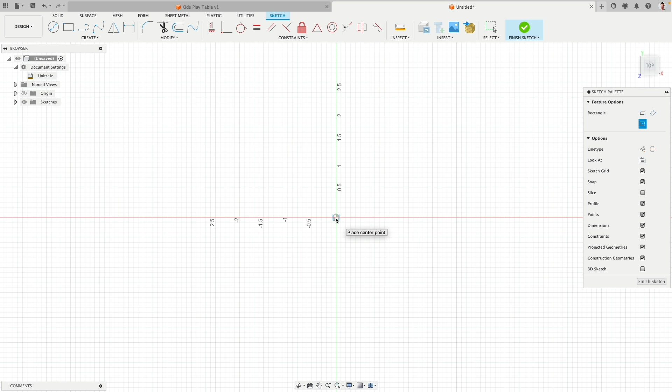Click the top view. Now there are really multiple ways how we can design this. Everything I'm going to show is just one way. So we'll create a sketch, click on the plane, create rectangle, center rectangle. I will start from the center point because I would like my rectangle to be glued to this center point. Drag this out and type in 24 inches.

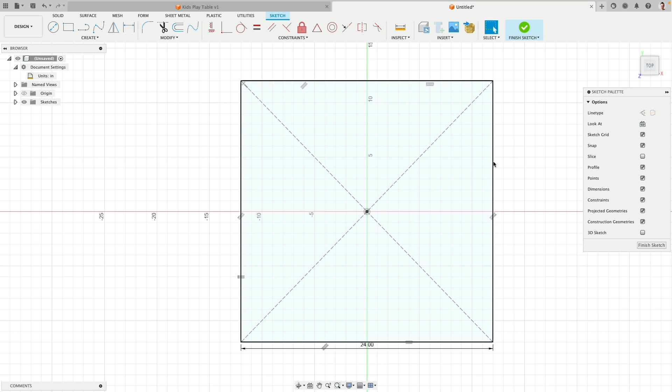Zoom out. I will go to the equal constraint and make both edges equal. So now when I change this, you see the other edge updates. So I have a square, not just a rectangle. Finish sketch. Let's change the view. I would like to have a tabletop that is actually half an inch thick. So I go to extrude, drag this up, 0.5.

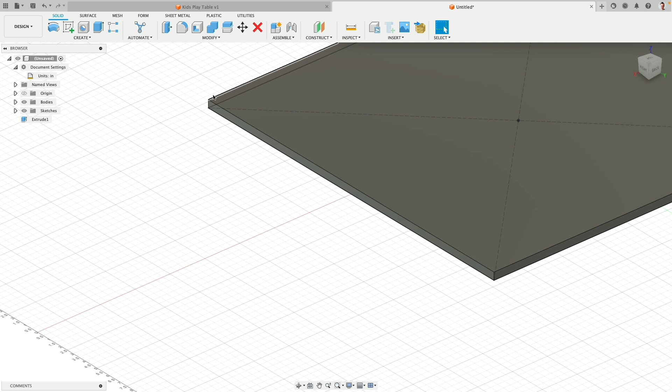There we are. I have some edges also rounded. So I zoom in and just select with the left mouse button and shift these edges. There we are. Fillet and say 2 inches. Press enter. Perfect.

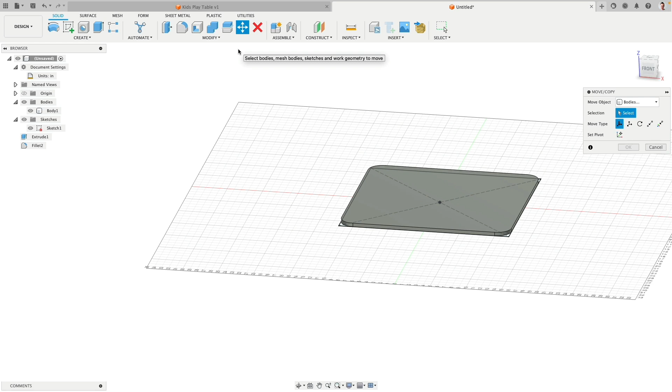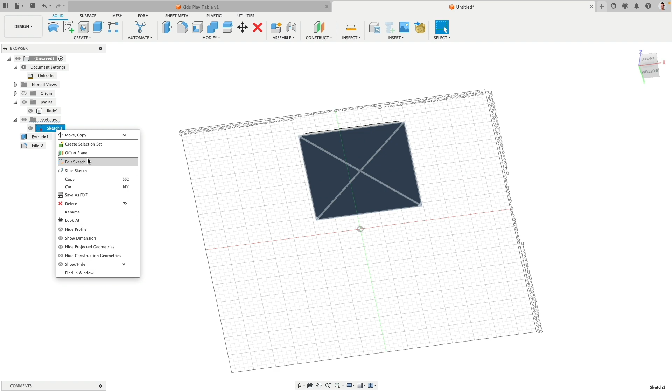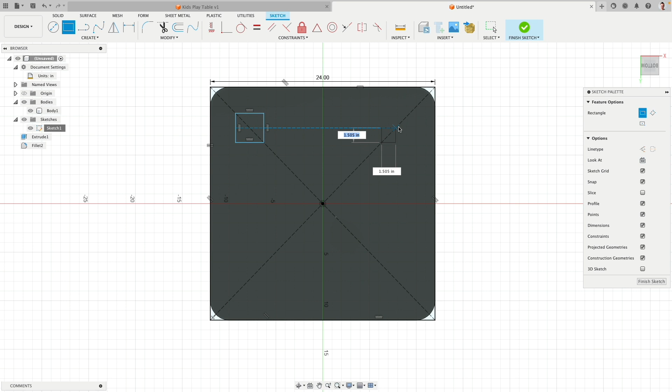Let's actually work on the legs. So I will go to the sketch, right click and say edit sketch. Instead of creating a new sketch, I just continue adding to it. And we need to have something for the legs and then the stabilizers. I will use the 2-point rectangle. Drag one here and drag one there. Then I go to dimension. This should be 1.5 inches.

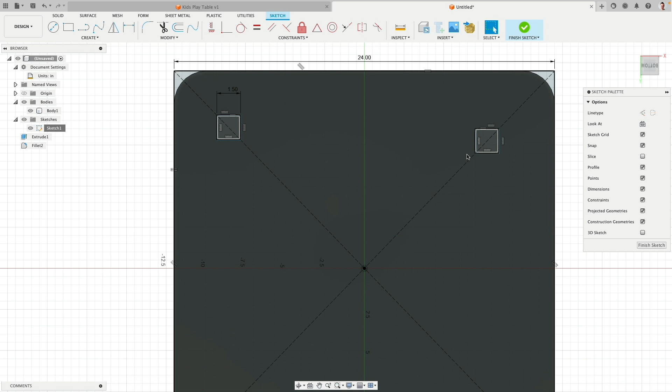I can go equal and say equal, equal. Perfect. So they're the same now. If I make this one, the other rectangle square will update. When you move your mouse to these endpoints, you see there's some additional icons popping up. This is actually the coincident constraint. I started drawing on this line and ended drawing on this line. So click, click. This actually glued these points right onto these lines. So I cannot move this rectangle anywhere else. I can only glide it along these construction lines.

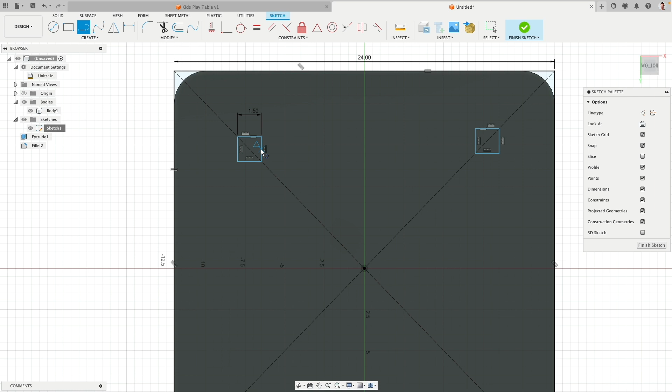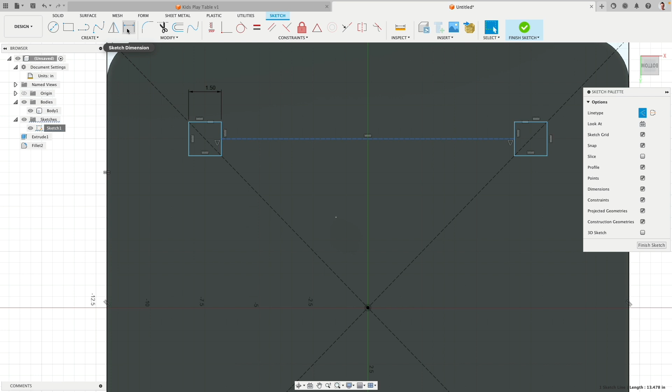So the distance should actually be 19 inches. So check this out. From the midpoint to the midpoint, I draw a line. This line now I will make horizontal. Then I will make this line, press escape, select the line and then go construction. And this is 19 inches. So dimension, there we are, 19. Perfect. Very good. This is actually very close to this edge. Let's go ahead and make this 18 inches.

Beautiful. We need to have 2 elements left and right that define, for example, the boards. You see in my case here, this actually is orange and a construction line. And that is because I have the construction line type on while drawing. Press escape and I turn this off and then draw, you see there it is. So how do we fix this? Easy, select the lines, switch it to non-construction line.

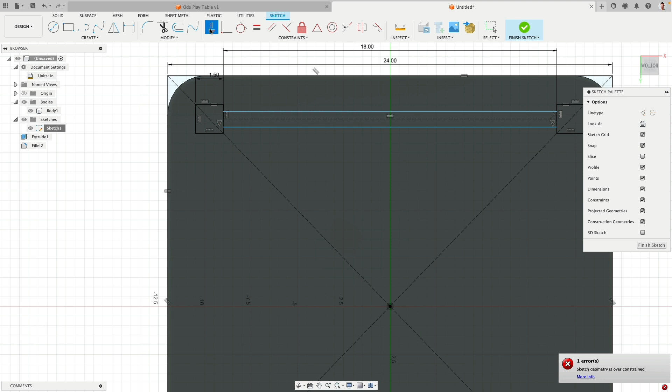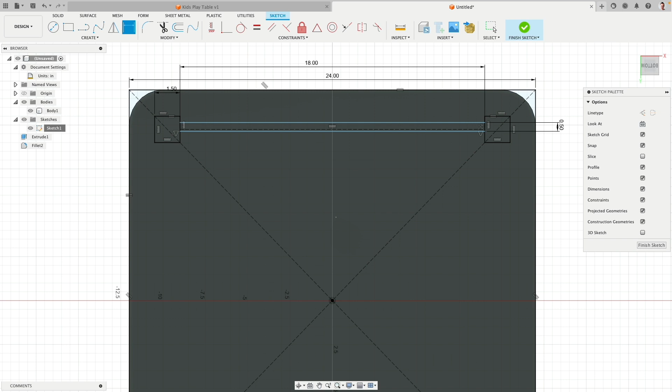I would like those to be horizontal. Perfect. It's over constrained. That means, oh, I already have perpendicular constraints. So this is good. Everything is perfect. Now the distance of these two should be ½ inch. 0.5. But now I would like these two lines perfectly evenly spaced from this line. So how will I do this?

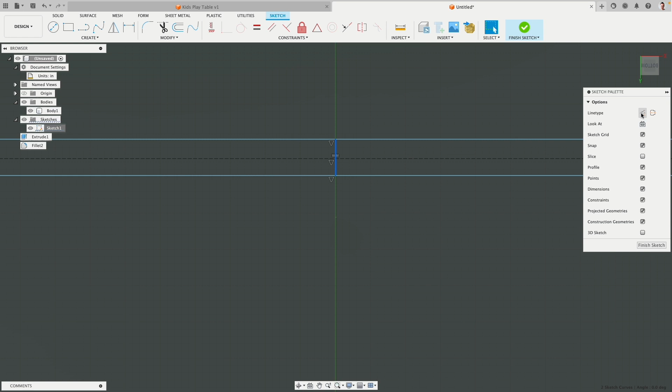Press escape, drag this one down a little bit, go to line. Here's the midpoint. Click to the midpoint, midpoint to midpoint, escape. Select these two lines and say construction. They're still selected and say equal. So that fixes it.

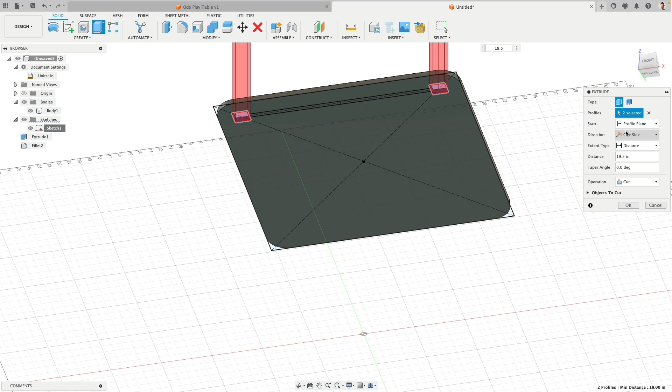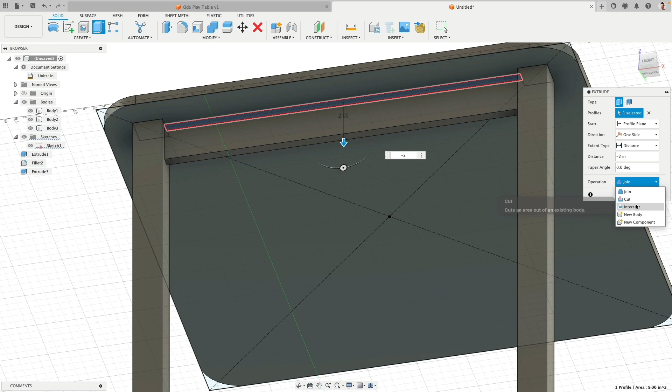Pretty nice. So what I can do now, I can select this and bring this down 19.5, the opposite direction, and as a new body. And then I can do the same also with the centerpiece, but that has to be a second modeling task. And we bring this down -2 inches. There we are. Beautiful. Kind of good.

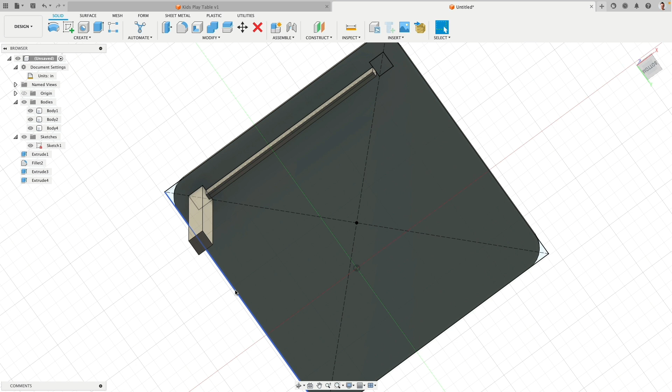This body here I will select and delete because I can actually select this and then rotate copy it. So I select this one, I select this one, then I go to circular pattern. These two bodies are selected. Select the axis, that will be the Z one.

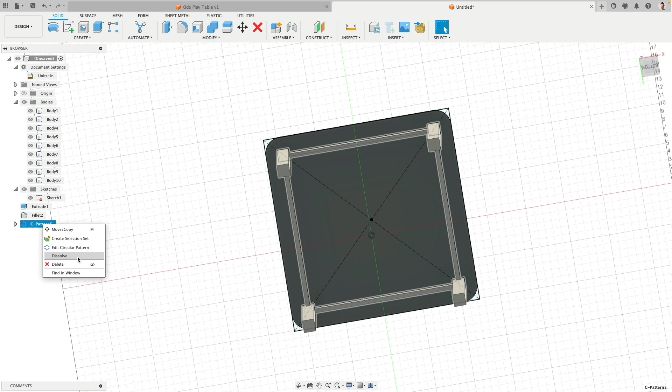4 pieces, thank you. Now because this is a rectangle, essentially we can draw a circle through the position where these legs are. That's the reason why the circular pattern actually here worked. Then dissolve and dissolve. Very good.

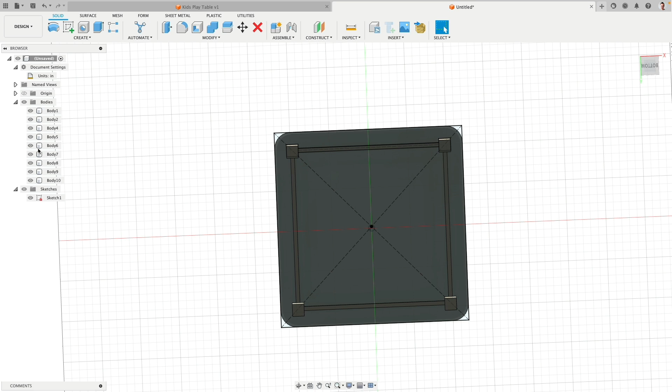To make this a little bit more stable in terms of furniture design, we need to have another support that's kind of like perpendicular to these lines. And that is connecting this piece to this piece to this piece. So it's actually pretty easy. Let's go right click, edit sketch, bottom, zoom in.

I will make my line here from there, kind of like to there. Look, this is now perpendicular to that ray. Perfect. Zip, there it is. And in case you do not see this, I will show you how we can do this. So this line to this line, be perpendicular. We need to close this sketch with a line. So no, this is actually a fillet.

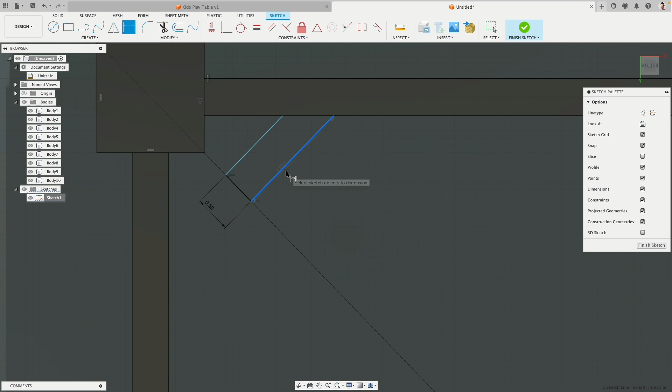And then this line here, I can dimension 0.5 of an inch. Very good. This I can also dimension. Pay attention to how I'm moving my mouse, a vertical or an aligned dimension. Let's say this should be 1.5 inches. So the whole piece will be 3 inches long. Beautiful. Cool. Okay. Finish sketch.

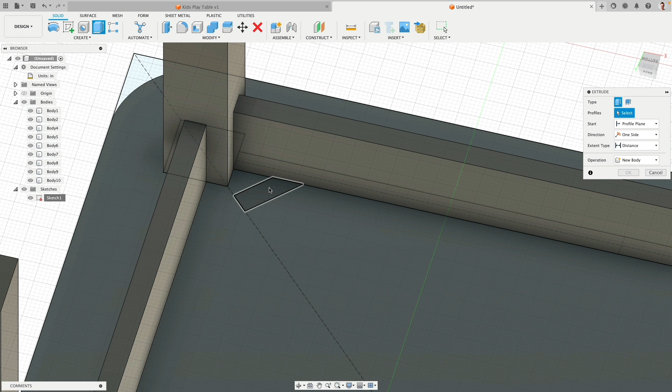Extrude this one up to here. You see I just clicked on that surface, so it copies actually the distance. New body. Thank you. I didn't draw the other piece. Well, I can use the mirror command. So this one along this face, join, yes. Perfect.

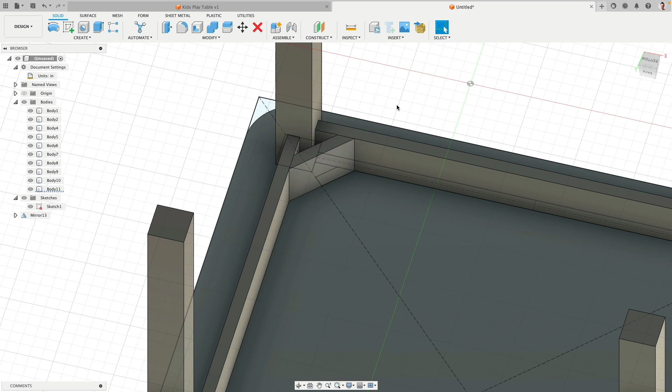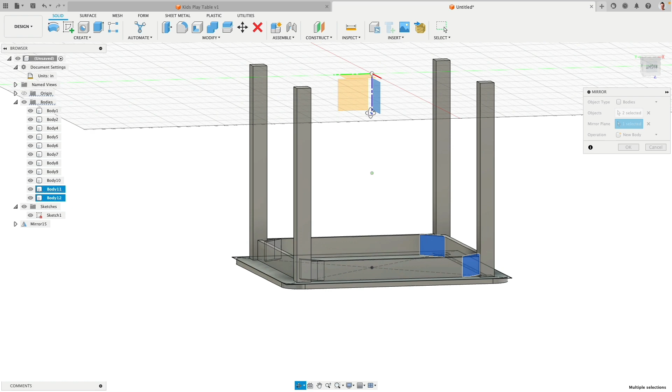Because this is a rectangular or square piece, I could go ahead, select this and say mirror. No, this whole body along this plane, and then all this mirror, so you and you along this plane. When I'm clicking there, you see the center planes. That's also why I work symmetrical along the center point of my sketch. Click OK. There we are.

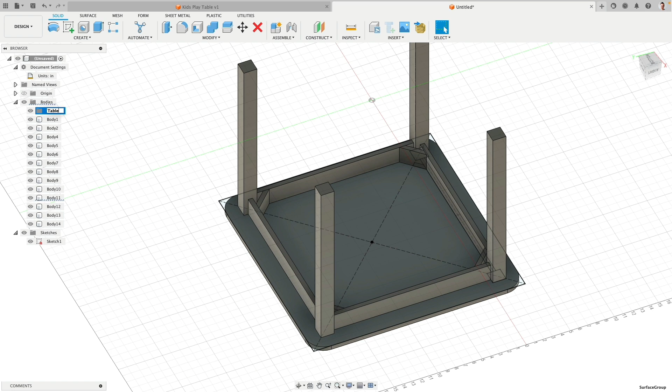So you see the outcome is the same, like the circular pattern tool. And there we are. Then we can make a new folder, double click, table, and then we put all these bodies in there. That's actually really nice for an initial study. Okay.

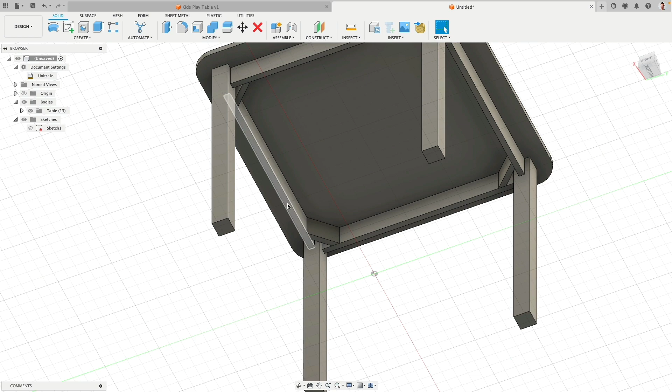Through here, for example, we would drill a hole and then put a screw right into this part, this edge. We would need to chamfer a little bit right where the mouse is and below, so it's a flat surface to drill into. And then here in these surfaces we would have holes to do screws and then connect actually the parts.

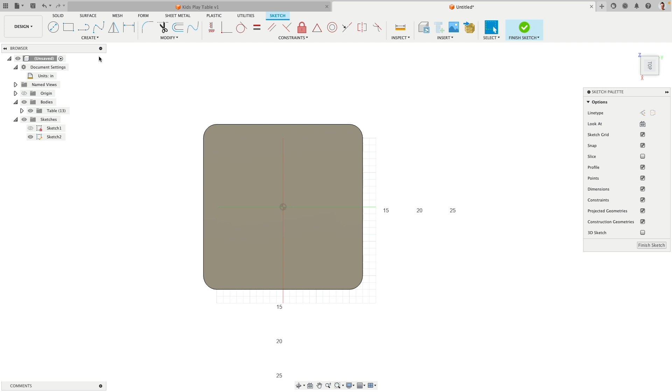Okay, so let's actually do the seat, the bench. So I go to top view, sketch. This time I just click somewhere on the white space that will be actually on the grid, on the ground. Then rectangle, center point somewhere here, and that should be 10 inches. There we are. Here again, the equal constraint.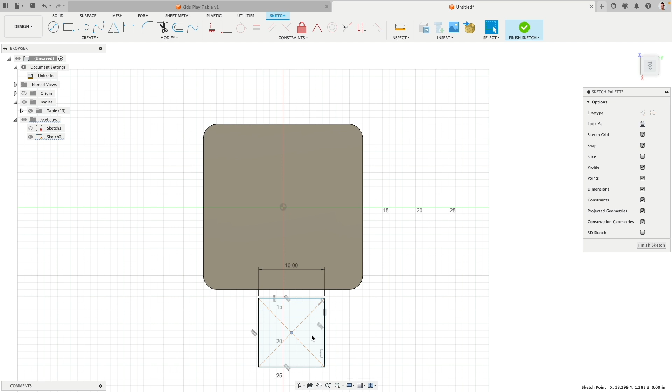And now I can move this, for example, out a little bit along this X line and figure out how does this look. This to this point. So the center point to the sketch center point, I would like to be horizontally, vertically constrained. You see now that actually I cannot move this left and right anymore, but only forward and backwards. That's quite useful. Okay.

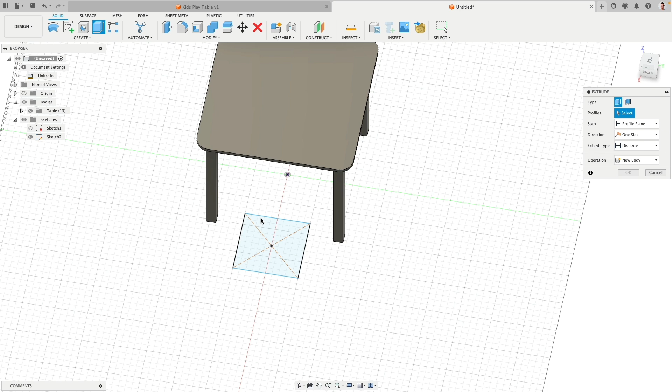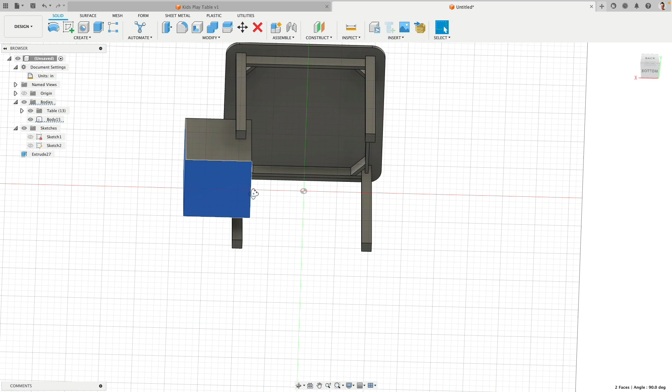This is all we need to build actually this bench. We go to extrude. This one goes up by 10.5 inches. That's a really nice block. How do we turn this into this design with all these parts without any extra sketches? It's actually very, very easy. So I select this face, this face, this face. So everything I want to carve open.

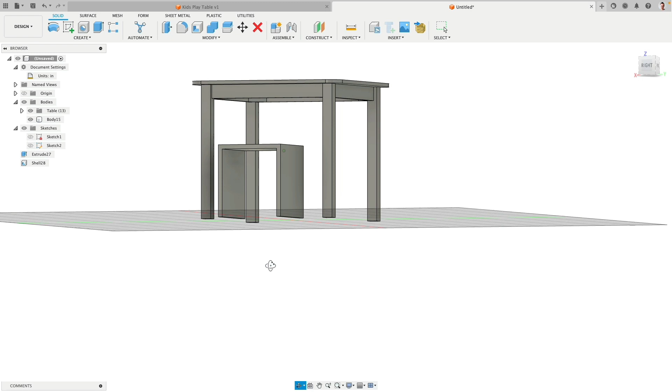Then I go to the shell command and say the material thickness is actually 5/8 of an inch. Beautiful. Cool. Okay, so now before I really continue prototyping a lot, I could go ahead and say, hey, let's quickly see how does this look when we do 4 pieces.

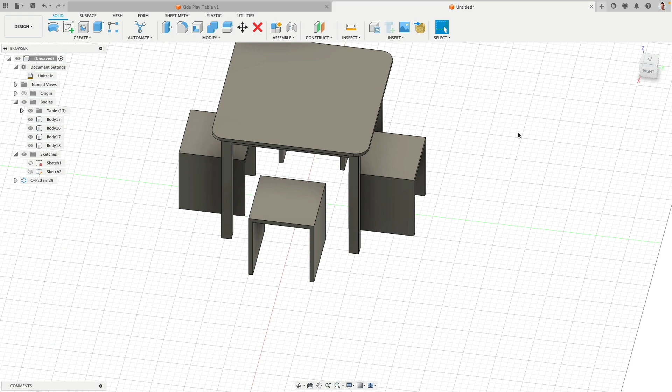Yeah, no, looks good. We can put all 4 benches under the table, 2 at least completely, or well, if we want to have all 4 a little bit under the table, that will work. So let's undo this step. This was a quick prototyping. I will hide the table so it's easier to see.

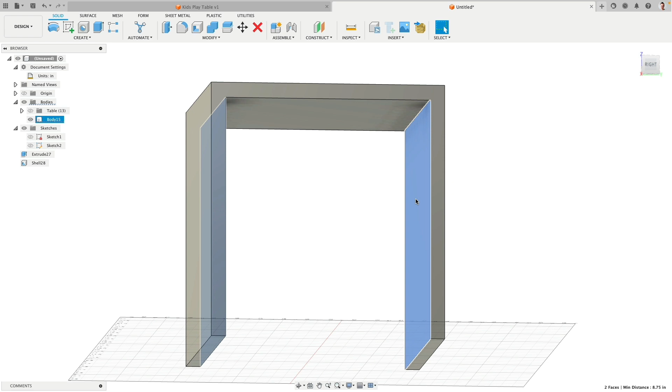This is going to be my main wood panel on top. So that should be the maximum height for the side panels. So I can go to split body. This body I split along this plane at the bottom. Now I already have my left and right leg. We know if I push on this side, everything will sooner or later rotate and break off.

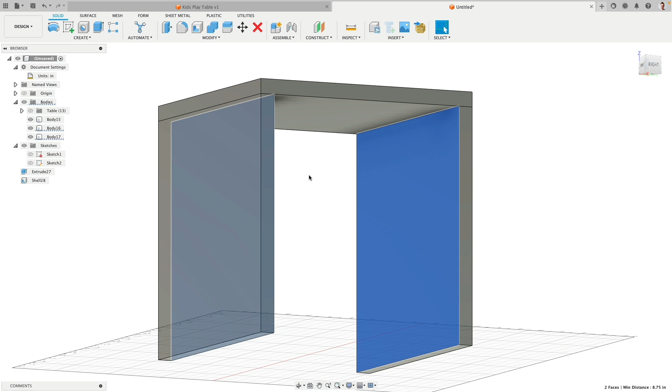I need to have something that stabilizes, kind of like restricts the movement, the rotation. Everything that can rotate in furniture design with wood, as long as it's not a joint, is sooner or later going to break, material fatigue. So we need to stiffen that up. And that's actually super easy to do. Again, this is just only one way how we can do this. There are multiple ways. Let's make a copy of this piece.

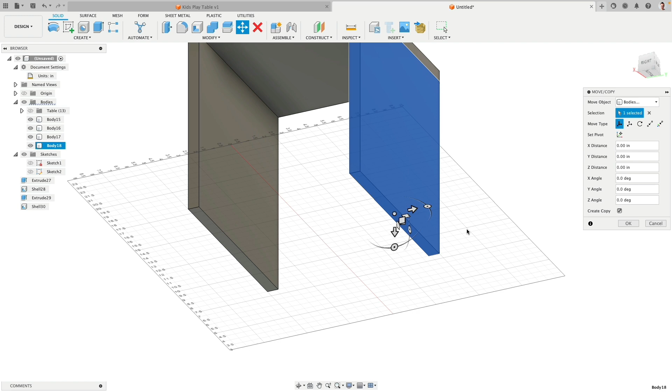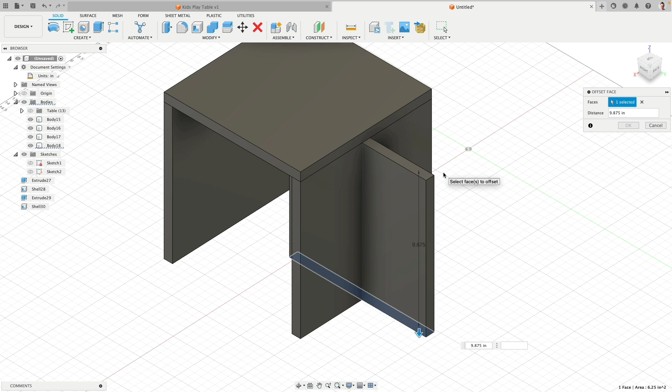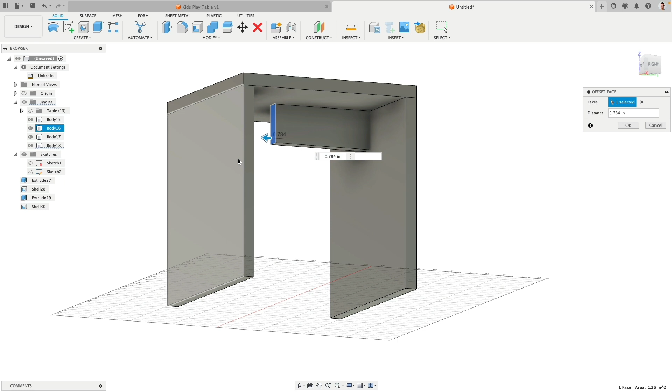Let's see, 4 inches. That's too much. 3, 2 is fine. Perfect. Okay. And now this face, I would like to move flush with this face. Right click and repeat. And this face, I would like to move flush onto that face. So you see, by just clicking on these target faces, it measured the exact movement distance.

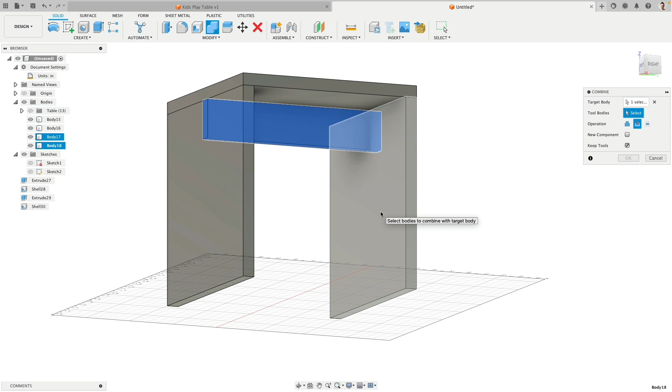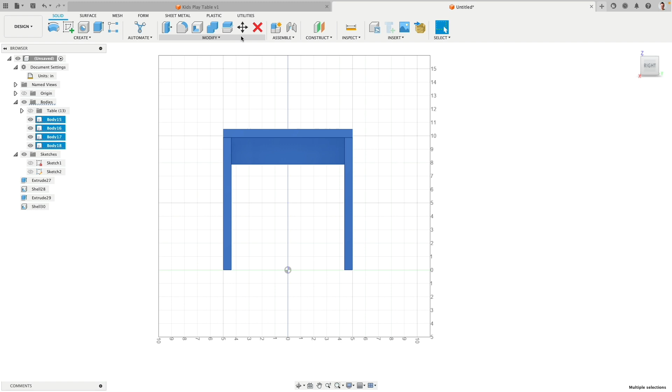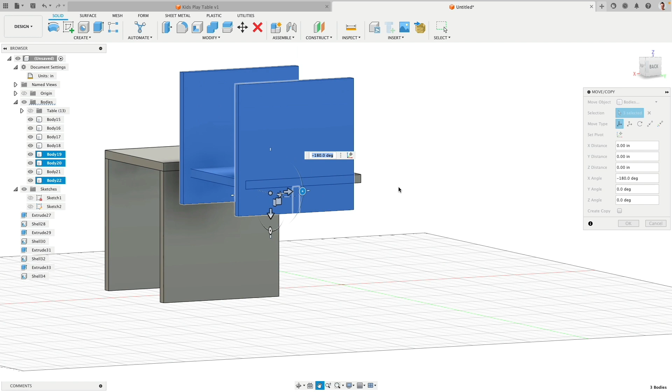Select everything, make a copy. Click on this button first. Bring this over there. Okay, and then I can select this body, this body, and this body. Going to rotate it. There we are. And then we do a move command and say this one to there. Plonk. Cool. There.

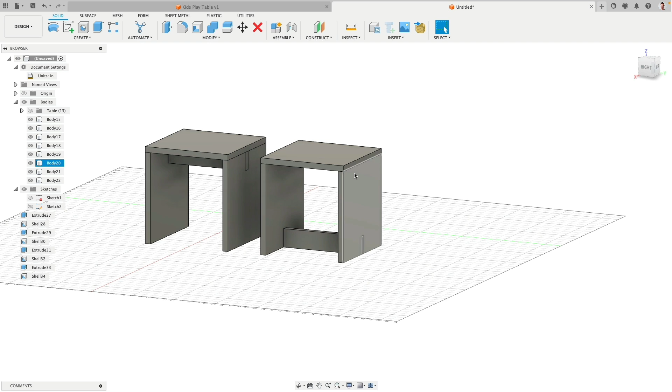Now, that's also one possibility. This construction is very stable because it prevents the legs or the panels really to move. The top panel actually keeps these two also in position. The only downside is we can't really slide anything under it. For example, the further we bring this down, the more we stabilize this. Okay, very good. So here we are.

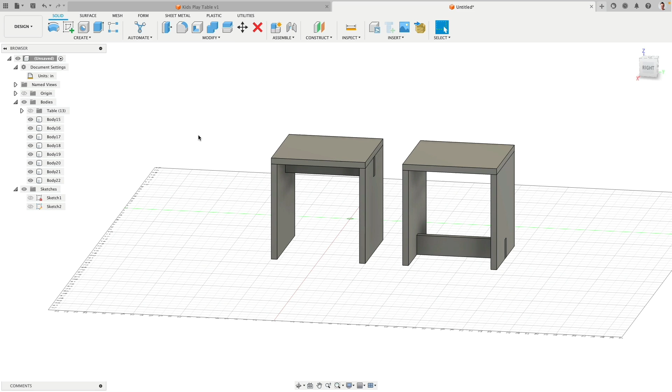Let's remove everything, and then let's make a new group. And let's say stool version A. And all this goes into there. And then we say create new group. This is actually stool version B. Whoops. All this goes to there.

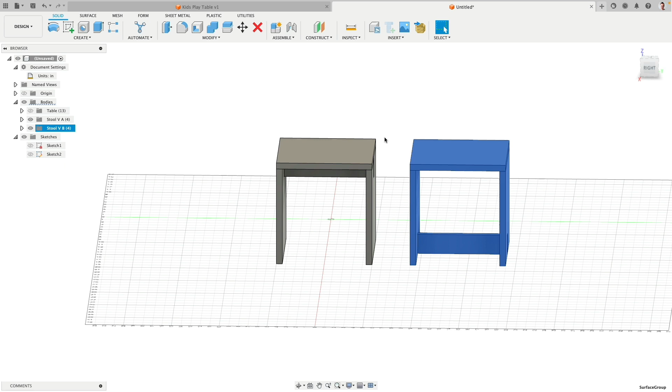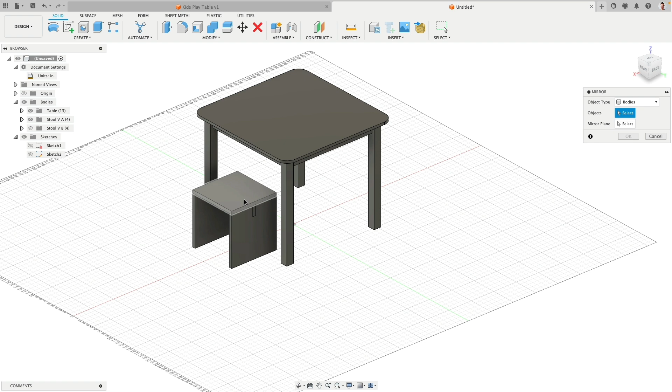All these pieces I would like to go into the correct position because we will make an alternating pattern. So from this to that. This one I hide, this one I show. So this actually I can easily mirror over to the other side. So I select all those to there. I could make a new folder, or I simply put this into the same folder.

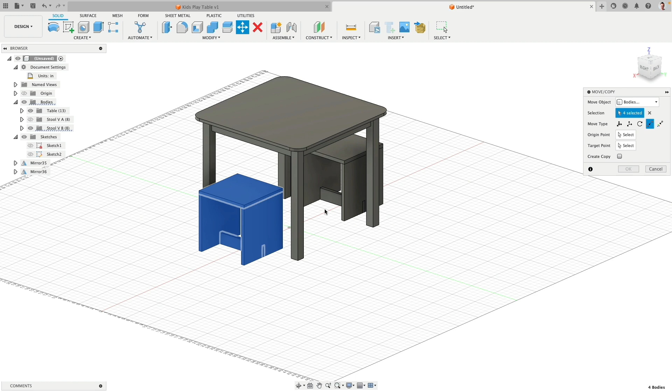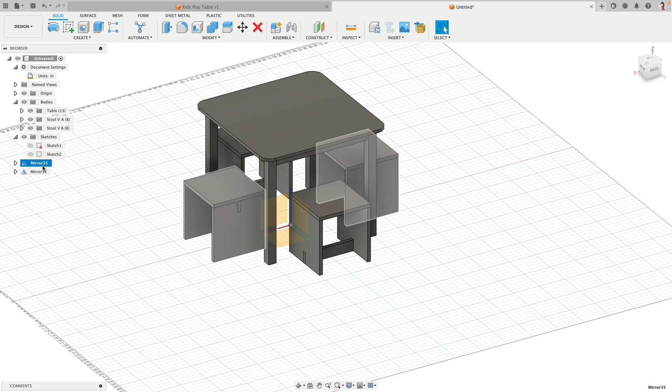And then here now I will do the same. Mirror, to there. Very good. Zack, zack, zack. Select everything one more time. Then we just do a simple rotation. Select the axis. There's no axis visible. If I go to origin, look, there's the axis. I can select and then rotate it 90 degrees. Cool. Some more dissolve stuff. And there we are. Now we have actually a nice design.

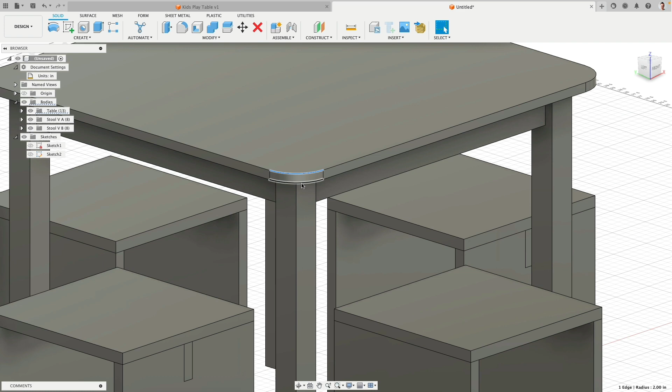As a finishing touch, sharp edges we don't really like. I can select these top edges and give this maybe 2 millimeters of edge rounding. Wait, we're in inches. We can type in millimeters? Yes, actually you can. That works really well in Fusion. There. Then I am also going to show you how we can fix and prepare this top part.

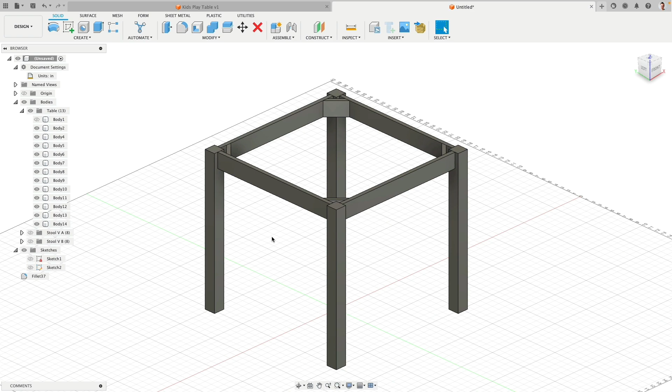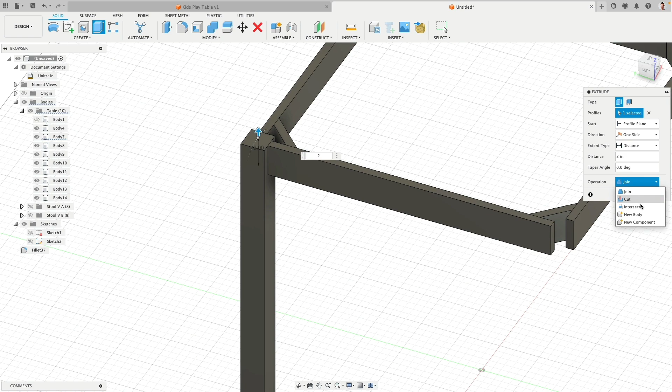So here, this edge needs to go down. So this body, and this body. So this one will go down -2. This one will go up by 2, but as a new body. Then this edge we will chamfer a little bit. Let's see by how much. 0.5. Okay, very good.

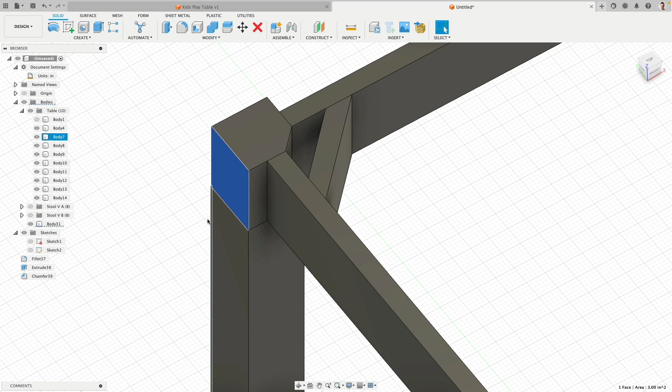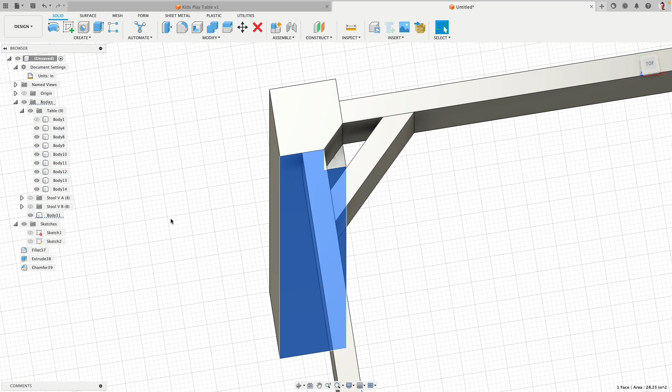Then we need to join these two together, so it's back one piece, but hold on. Why do I see two things there? Oh, keep tools. That's why. I want them to fuse. Now this is one piece again. And you see basically now I have this interesting element. Right click, isolate, so we can see better what's going on here. So this will be cut.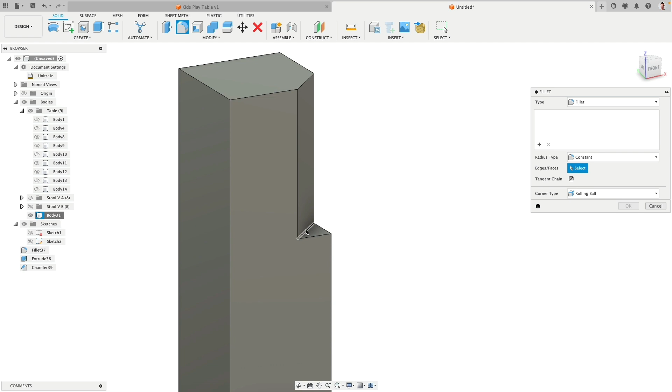You could cut this with a saw, but in reality this will be done with a router bit. Here we would have something that is more rounded. To do a quick fix, we could go ahead with the fillet command and round this a little bit to give an idea of how this will be rounded. We will end up in Fusion with a tiny bit here. That's fine. So that's kind of like version A. Or version B, if we want to play a little bit more, we can go to the move command.

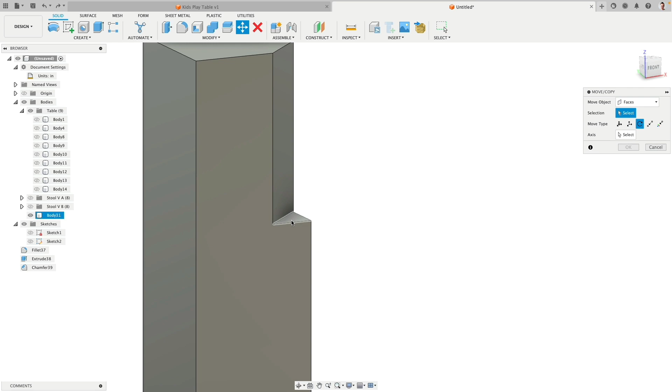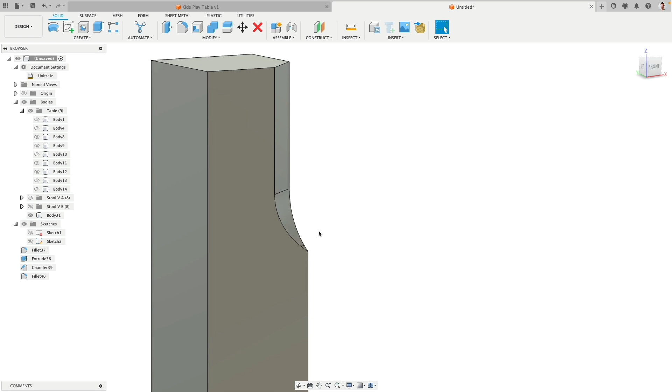Let's go to the face. What can we do with the face? So this face, rotate it along this edge. Oh look, we can rotate this 45 degrees. Ta-da! And then we can select this and round this so it's a little bit bigger. Looks less terrible. It's also less painful. Cool. Okay, now we can show everything again.

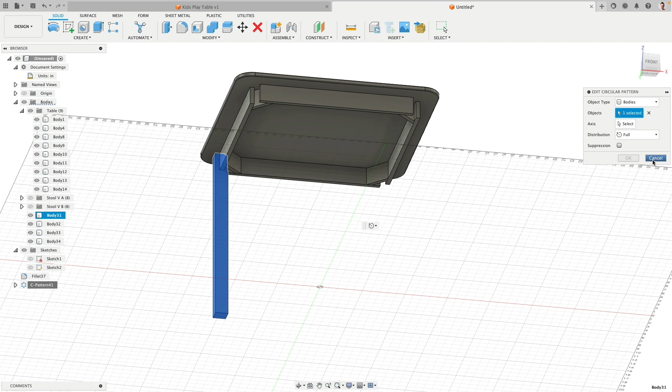The other 3 copies are missing, so what's the easiest way to bring this all back? Here, circular pattern. There, 4 times. Cancel. Oh yeah, you saw now if you click on edit, then you can edit this effect. It's kind of like interactive, but I want to bake this into final pieces. There we are. And into your folder. There, beautiful. There we have actually this design. That's it. We did it.